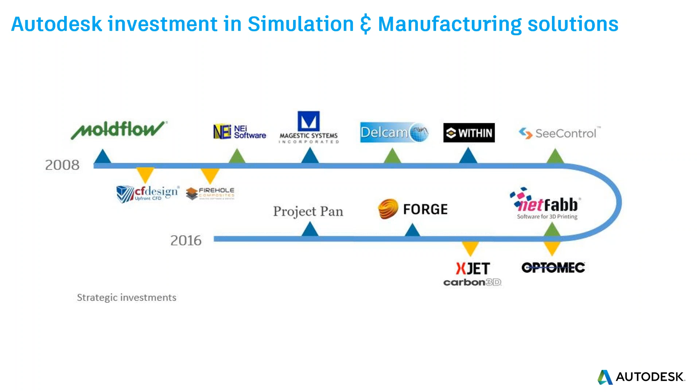Two key acquisitions for looking at mold tooling and the injection molding process are Moldflow and Delcam. Moldflow was established in 1977 and is a key brand name in the injection molding simulation world. We also have Delcam, one of the world's leading suppliers of advanced CAD/CAM software for the manufacturing industry. They were also founded in 1977 after initial development work at Cambridge University, and they've been growing ever since.

High volume production can take the form of injection molding for plastics. It's a very competitive area, and there's a lot of pressure on pricing, which can squeeze margins from any project. So differentiation into higher value business, addressing the needs of complex and more accurate tooling, helps regain a competitive advantage through use of new technologies and increased machine utilization.

This is becoming more important for the mold industry as designs become more complex, and critical mold tool design questions need to be answered early in the manufacturing process before they become expensive.

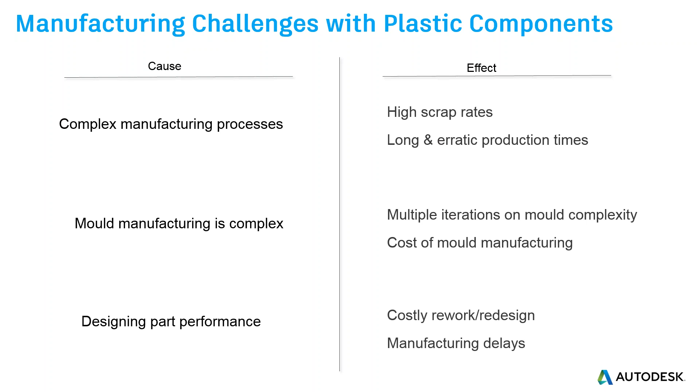If we look at the design optimization process, typically we would see this process of validation. Going from design into manufacture, the costs will increase, and the cost of making changes as you go through design, engineering, prototyping, and production becomes much more expensive. It increases tenfold at each step as rework becomes more complicated and more difficult to do on existing designs.

If we look at the optimization process, it starts in the design phase, where we can start to optimize part design and mold design. Any changes at this stage are relatively inexpensive, which helps keep costs low during the process, so there is no need to validate. Once you get into production, you already know what to expect and that things will work the first time.

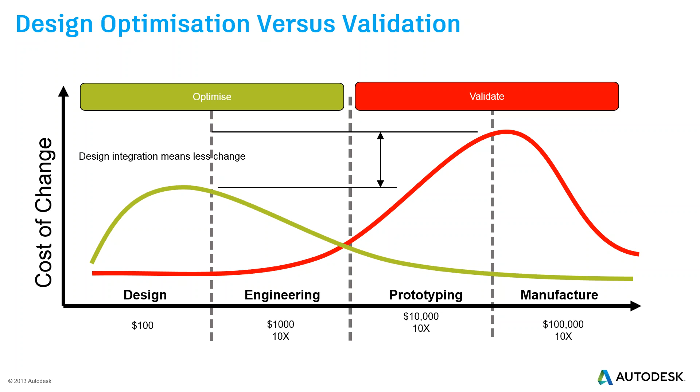Information can be passed on from design, engineering, prototyping, and manufacture, meaning fewer changes are required. We can identify issues very early on, eliminate them at that stage, and there's no need to make major changes downstream.

So it is a multi-stage development process. We look at the objectives of what we're trying to do at the top and the risks at the bottom. On part design, we want it to be suitable and fit. There may be structural requirements, but can we actually make the part? Will it be to the correct size?

Once you get into mold design, there are tooling features we can address, such as cavity and core design, cooling, ejection, gate and runners. But how do we know the cooling design is optimized? It's going to give you uniform mold temperature. Is the feed system design going to give issues? Where should you vent the tool?

Once you start cutting the mold, you can define tool paths. But are these optimized tool paths? Are they going to give you the risk of interference?

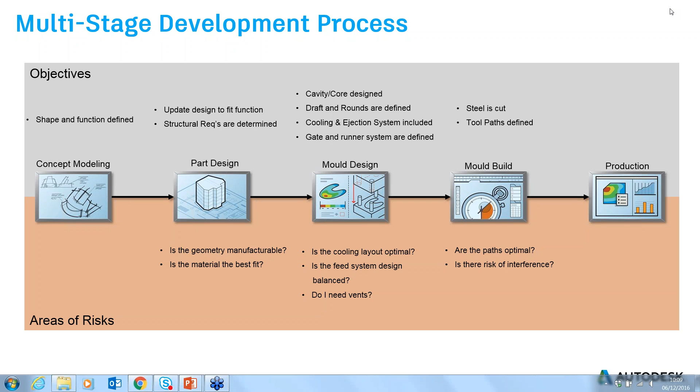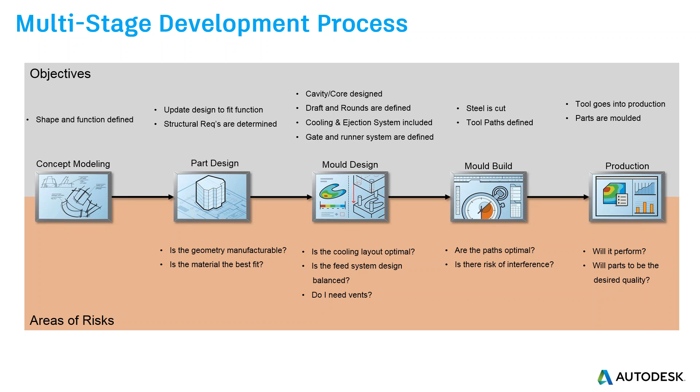Once you go into production, molding your parts, how do you know the mold will perform? Will the parts be accepted? Will they be of the desired quality?

So we can look at this another way. We can look at the stages that we typically go through.

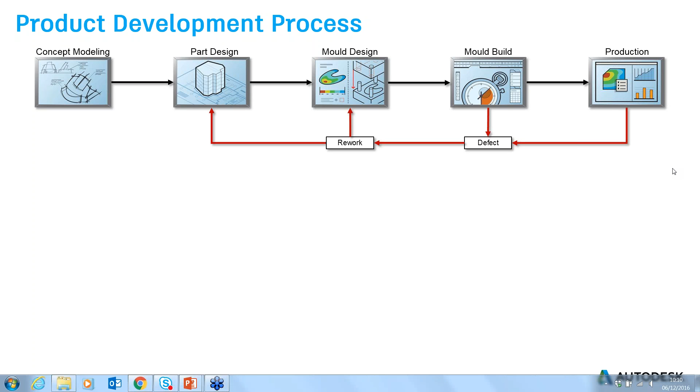And if we find defects while we're building the mold or while we're in production, then it goes back for rework, often involving redesign. It may be that the part has to be redesigned.

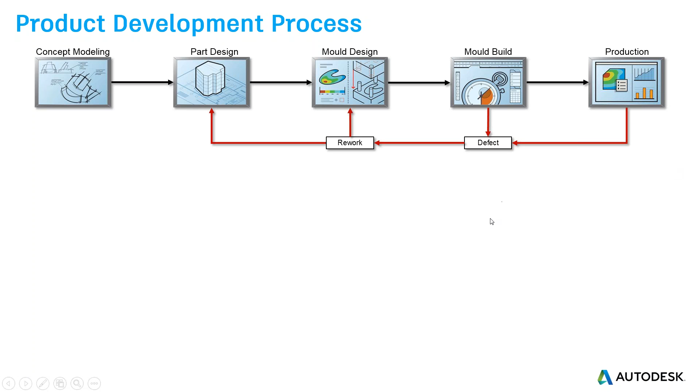So this is the typical process that we see. And as I said before, the costs do increase during this process.

If we start to introduce inspection, advanced techniques for making the molds, then we can start to identify defects in the mold that could lead to poor parts being produced very early on. And then we can actually redesign at this stage and rebuild the mold.

So this is what we call forensic analysis, where before we go into production, we can do some inspection, some forensic analysis. And this can save us time compared to finding out these problems when we're in production or trying to get the mold into production.

We can introduce CAE, simulation for plastics, coupled with mold design using advanced tools. We can start to identify any issues before the mold is built and eliminate them. So we can validate that the mold will perform before it is built, and this saves further time and costs.

If we can start applying these technologies very early on, even at the design concept stage, information can be passed along, verifying wall thickness, material selection, injection points, etc. And this will further reduce the costs and time. And now we're actually optimizing as well.

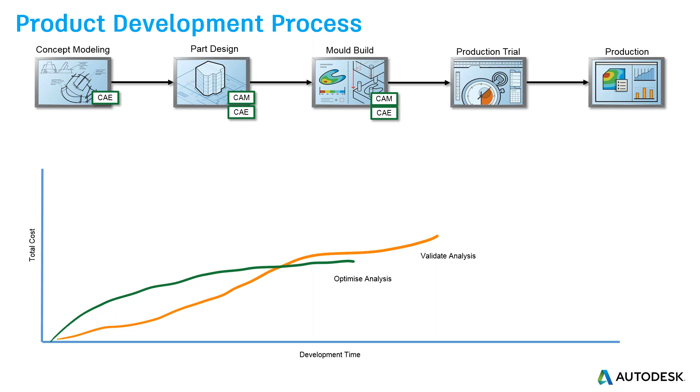So we're not just checking that the parts can be made to the desired quality. We're not troubleshooting, we're optimizing, so we can reduce costs in this way by making the whole process more efficient, making sure we're selecting the right materials, and even reducing material content.

So this has benefits for lower costs, reducing time to market, especially with warranty issues, recalls, and it gives you confidence that the design will be right.

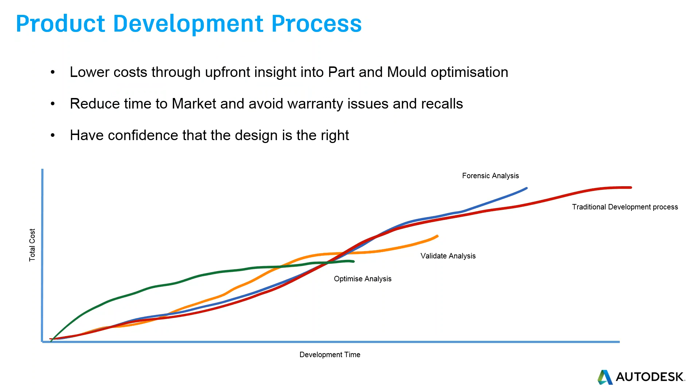So Autodesk can deliver these solutions to help you. It's a single source for parts, mold and injection molding process optimization. And it's using the leading plastic injection molding simulation with Moldflow and the leading machining technology with solutions from Delcam.

So we'll begin with looking at Moldflow. So at the part design stage, you could be faced with these challenges as a part designer. Will the part fill without defects? Where should it be injected to make sure that it fills okay?

Will it have surface defects? How do I know that I've chosen the right material for this molding? Will there be weld lines? Could be an area of weakness or visibly unwelcome.

Will the part distort after it's been molded? Will it be to size and shape? And will it perform in service? Will there be any issues because of perhaps high internal stresses?

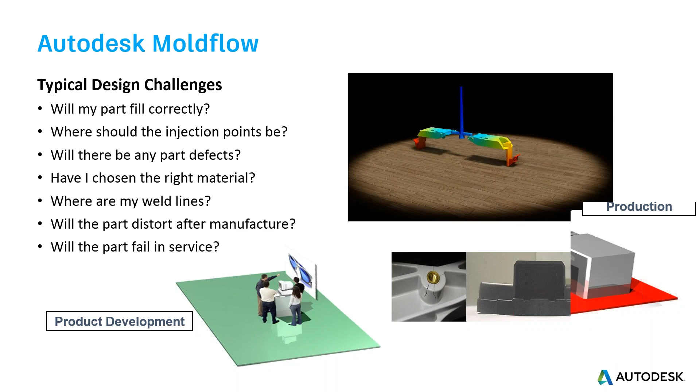And at the tool making, the tool design stage, there's lots of questions. So if you're adding cooling systems, are they in the right place? Are they optimized? And what mold shrinkage should be applied to the mold?

Is the feed system optimized? Is it over-designed? Is it balanced? And what machine can it run on? What clamp force will be required?

Will it be easy to mold? What will the cycle time be? Can that be reduced? If you've got other production tools, can they be reused again?

We want to know the mold's going to run first time. We don't really want the production guy to be trying to troubleshoot any issues to try and get the part in production.

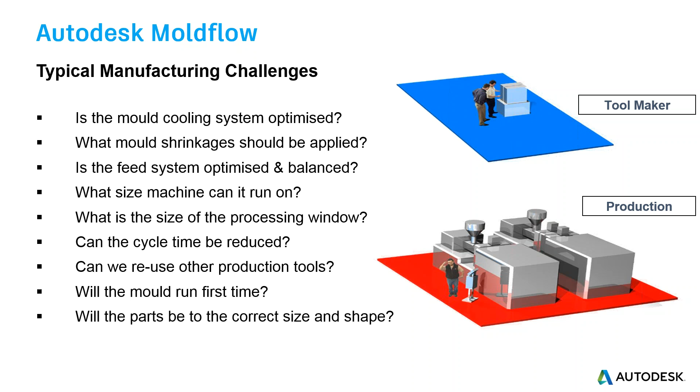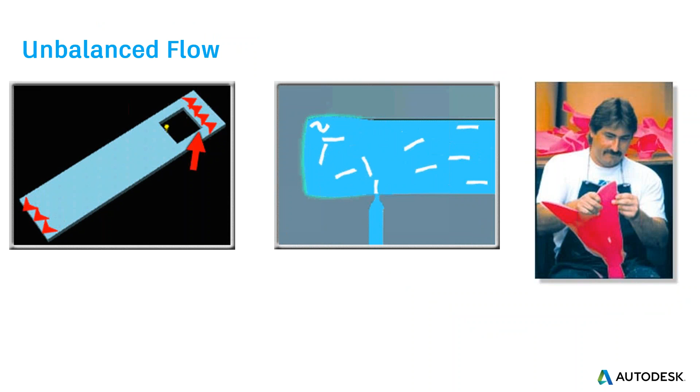So if we start with some of the basics, one of the main issues of poor product quality can be that of unbalanced flow in the cavity. So this means that some areas are filling before others, and while they're still filling other areas, these areas can become overpacked. They will shrink less.

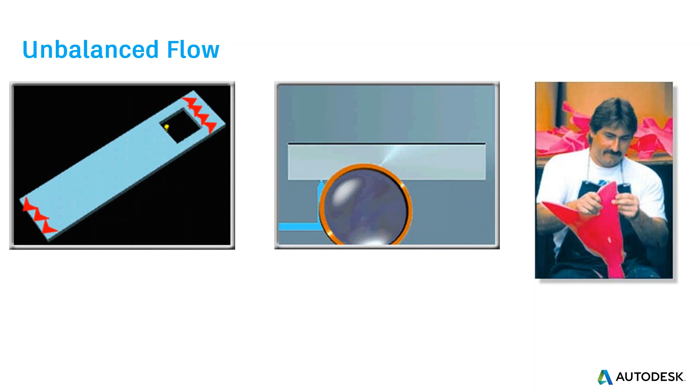Lower shrinkage will mean different dimensions, and also it can induce warpage in the component. It can also increase clamp force, and the mold may actually open and flash.

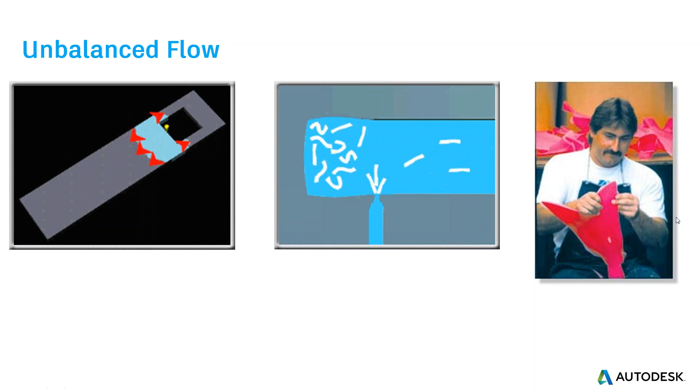And we still see people sitting by machines trimming off flash. And this isn't always due to mold wear. It can be because of this unbalance where the mold is open locally to let material out.

So Moldflow can help answer some of the basic questions of where to inject. If you've got this component here, we allow one injection point. Where would it go? There's recesses to the right, there's a lot of material to the left. Will it go in the middle, to the right, or to the left?

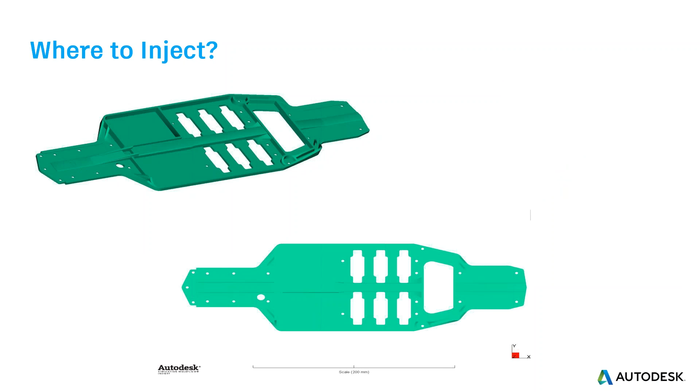Moldflow can show you the best place to inject for flow, simply going from blue to red, where blue is the best and red is the worst place. And in this case, we're leaning towards the right for the injection point.

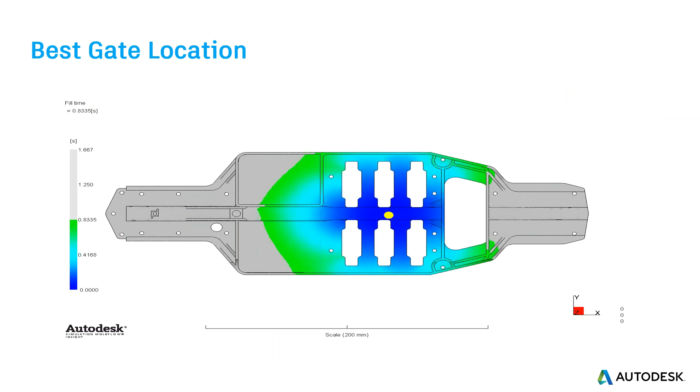If you put an injection point here, we can actually see how it fills. So we're looking at contours of filling in time, and we can see that the ends of the component are being reached at the same time.

And it has benefits for minimizing stresses in the component. It will reduce shrinkage variation, it keeps shrinkage under control, it can eliminate part warpage, it keeps clamp force to a minimum, and in turn that can help with mould life.

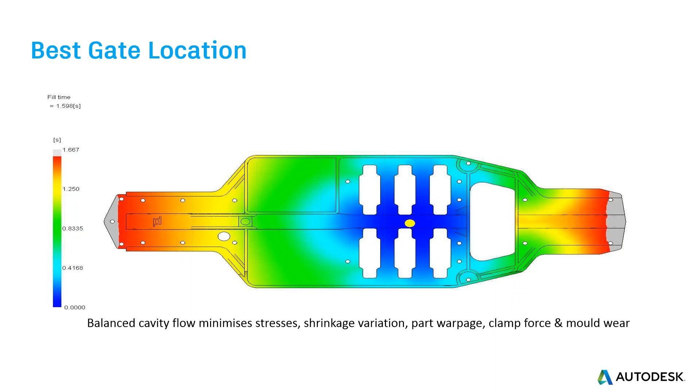With the feed system design, the same principles apply here. Is it balanced? Is it going to deliver material into the cavity so that it fills uniformly? The software is capable of resizing runners automatically to make sure cavities fill at the same time. It will allow you to look at the size of gates to make sure they're not over shearing the material, degrading it, or changing the colour of the material.

So again, this can eliminate flash, reduce clamp force, and increase mould life.

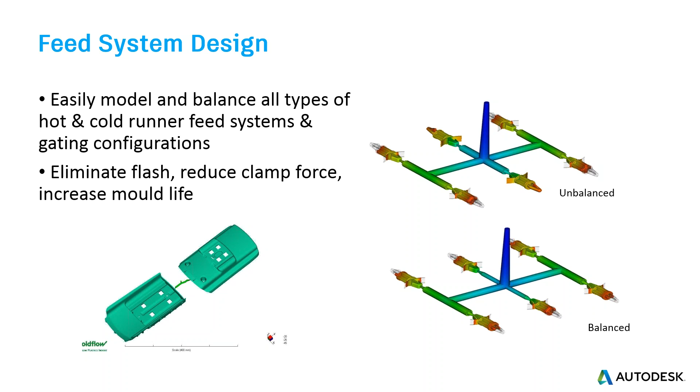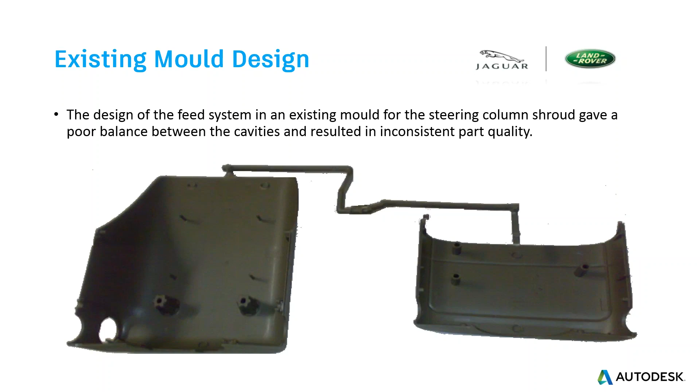So one of our customers, Jaguar Land Rover, they had a 1+1 tool, and this gave problems during injection moulding. It's a poor balance between the cavities, and it resulted in inconsistent part quality. They couldn't get the sizes quite right for both of them. So they looked at resizing the runners, but it was difficult to achieve with the existing runner design. So the only balance that could be achieved was with an S-shaped runner, which gave a longer length to balance on, and that was very successful, giving them some savings just on that one tool.

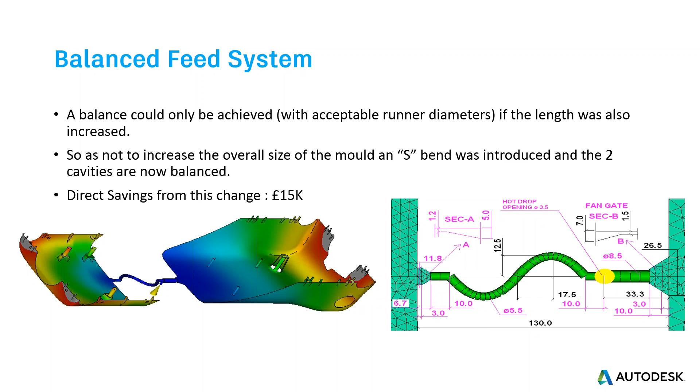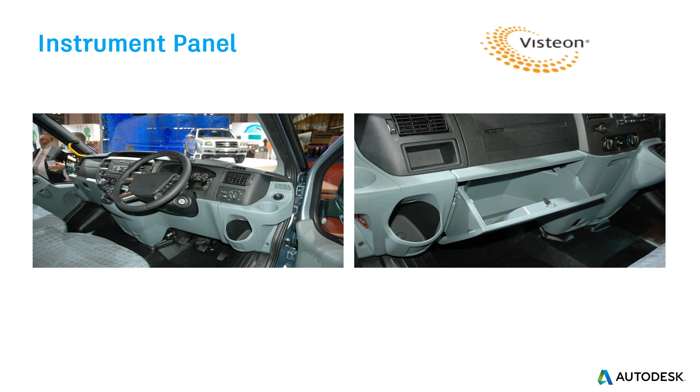We go to another level. This is from Visteon. They partner with many companies for the design and manufacture of components. Looking at the instrument panel here, initially this is going to be 2 moulds - one mould for a demister component and the main panel.

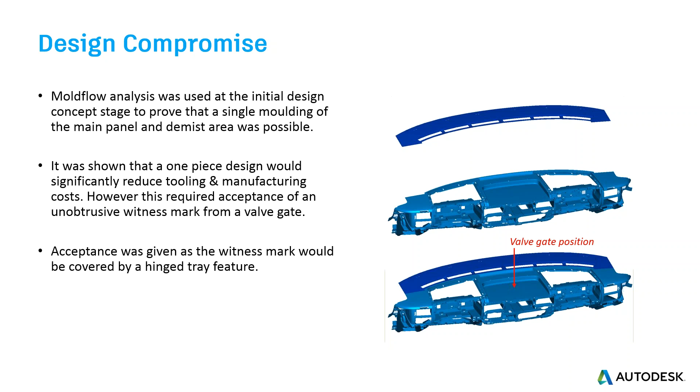And Moldflow showed that it could be moulded in one piece, in one mould. It would mean a witness mark from a valve gate being visible, but that was accepted because that could be covered by a hinged tray feature.

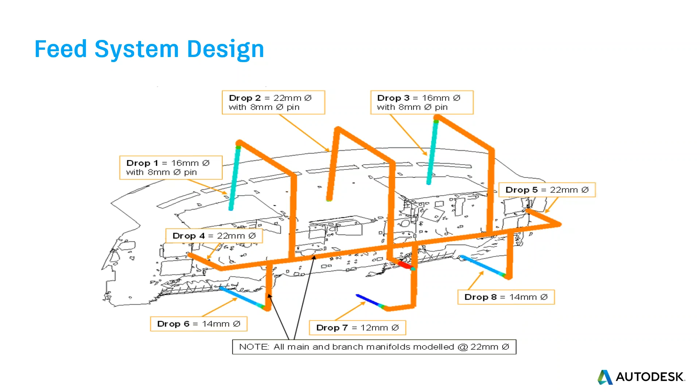Weld lines were moved to less critical regions by placement of the gates. Wall thickness variation will do that as well.

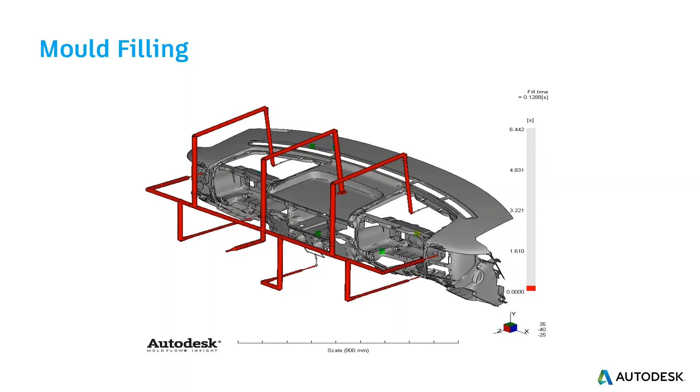Moldflow can also look at the details of hot runners, so detailed modelling of these can be achieved. This helps you to see where the heat from such hot runner systems will go. Will it actually get to the cavities, making them longer to cool, make them hotter on one side? And are they insulated correctly?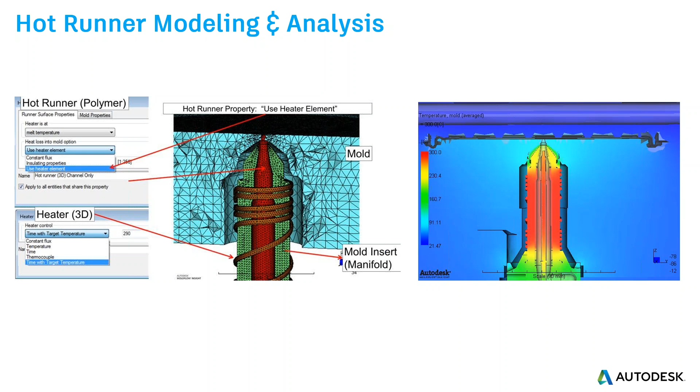So Moldflow will show the heat dissipation and allow you to make sure that your hot runner won't have any adverse effects on the process.

Our customers are using Moldflow in various ways. Haidlmair, they're a company that makes large volume moulds. In this case, they've got a big recycling container. But they're using Moldflow to actually reduce the weight of the mould.

So a lot of the weight's often in the fixed half. And by making sure they have the right injection positions, they can keep injection pressures low, stresses low, and they're able to redesign their moulds not to have so much material. They can reduce clamp force in this way, so the stress on the mould is not so significant. This also has benefits for reducing the energy of the injection moulding machine.

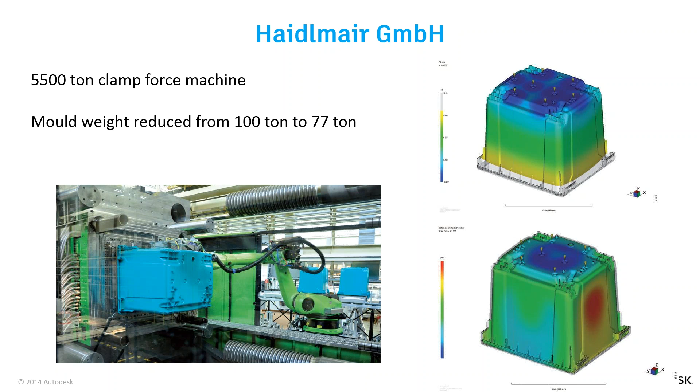There's also mould cooling to consider. How is the mould being cooled? You need to take heat away from the hot plastic coming in. So Moldflow can show you where to best position cooling lines, shows you the effect of cooling line position on removing heat. This can be steady state or transient.

You can interrogate results through the mould blocks, look at the effect of different mould block materials, see how many cycles are required to get the mould to a steady temperature, and look at the temperature variation within each cycle.

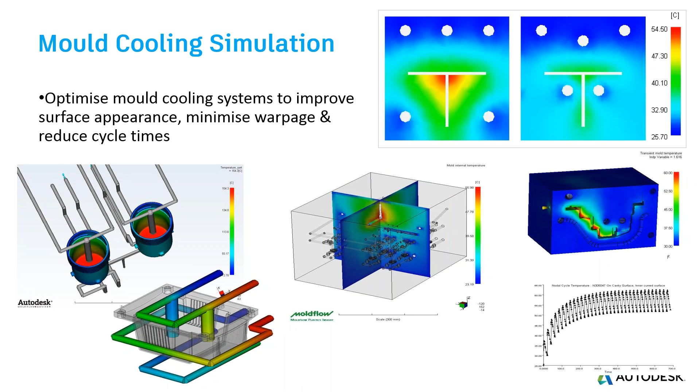Cooling lines can be imported or added within the system. This is an area that's often neglected, because if you have differences in mould temperature from one side to the other, that can promote bowing of the component. It can affect final size.

So one such company, Cooper Vision, they're already running a high cycling mould. They're running at 11.2 seconds. They wanted to get this down to 8 seconds. This would have a significant effect on output.

So using Moldflow, they were able to pay attention to the mould cooling, and they got cycle time down to 8 seconds. These moulds run for 24 hours, 7 days a week, for 3 years. So the quality has to be good, making sure that the modified cooling doesn't adversely affect the components in terms of size and the way it fills.

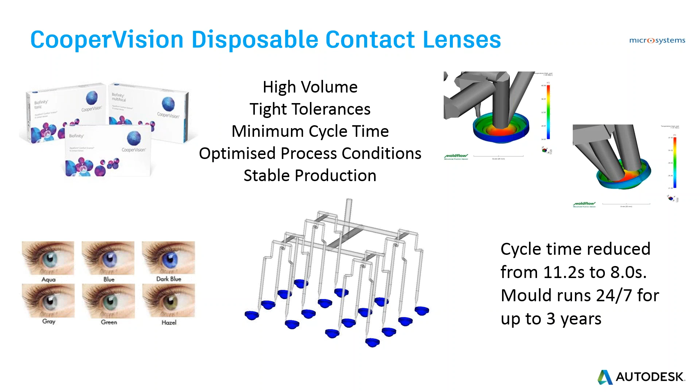Certainly we don't want to be seeing moulds being used as cooling jigs. So often parts can be kept in the mould for a bit longer to try and keep them to shape. But invariably the stresses will relieve themselves and you still end up with a warped moulding.

So this twisted bin lid was kept in the mould for an extra 40 seconds to help keep it flat, so it's running over cycle time. They're making more bins and lids. It was center gated, and Moldflow showed that had it been end gated, it would be nice and flat.

So rather than use the mold to try and eliminate warpage issues, Moldflow will show the cause of the warpage and allow you to eliminate it, preferably at the design stage, by paying attention to wall thickness variation, gate position, and processing conditions.

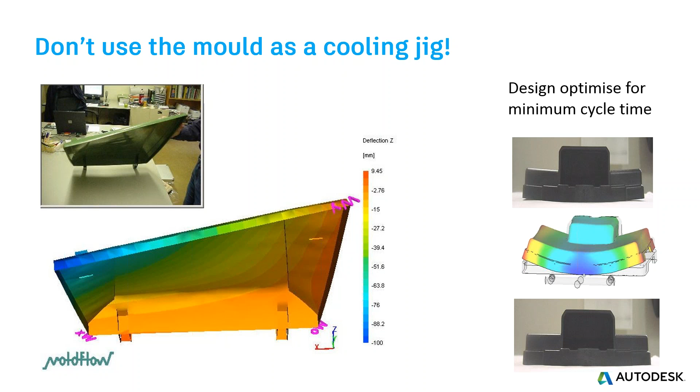Now we start to look at the manufacture of the mold, and there's many challenges here. There's the challenge of how do we actually make a large or complex mold. It won't be easy. How do we prepare for this?

Can we read in surface, solid, wireframe and mesh from any CAD system? How can we eliminate errors that can cost us? You've got multi-axis machines. How can we improve the efficiency of these? There's always pressures to improve the surface quality and accuracy of molds.

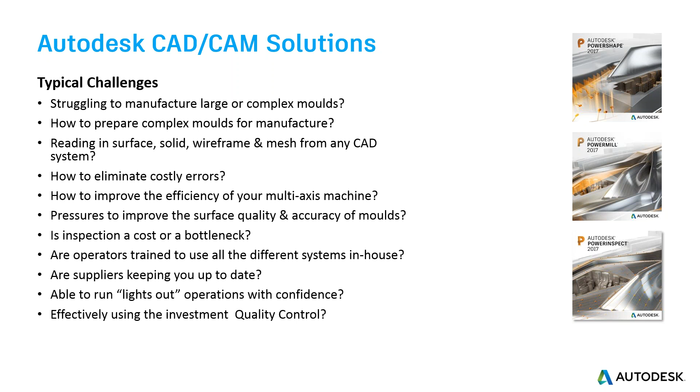And are you finding that inspection is a cost or a bottleneck in your company? You may have different systems for making molds, for measuring molds, but are your operators trained to use all the different systems in-house? And are the suppliers keeping you up to date? Are you able to run lights-out operations, mold manufacture and inspection with confidence? You may have invested heavily in quality control, but is that investment being effectively used?

So there are CAD/CAM solutions that we can turn to.

This is Powershape. So this is creating molds and dies and modeling for manufacture. This is where it excels. It allows you to create complex 3D geometry that you need to control your multi-axis or high-speed machine tools. It operates on 3D data regardless of which system created it, and it doesn't matter which format it is in. It can be solids, surfaces, wireframes, and even meshes.

Once imported, intelligent analysis tools automatically detect and repair critical faults that could complicate downstream processes. And unlike many CAD systems, Powershape doesn't insist on you having to fully repair your solid before you can do further work. There's many commands, including direct modeling tools, which will still work even on faulty solids.

So when creating cavities and cores and slides from a 3D part, Powershape will guide you through an easy-to-use wizard. In most cases, the shutouts and split faces are created fully automatically, leaving you minimum work to do to finish the mold.

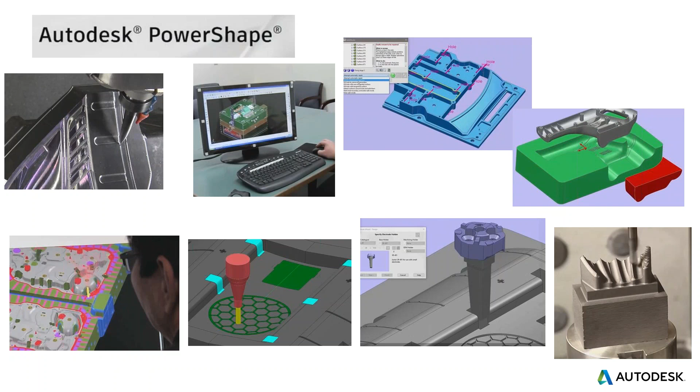We also have Powermill. So many of the world's successful manufacturers grow their business by making increasingly complex parts faster and more accurate than their competitors.

So to help achieve this, they invest in more modern capable machine tools, such as high-speed multi-axis machine tools capable of milling and turning, able to cut complex parts in only one or two setups. However, the full potential of these machine tools cannot be realized without equally advanced CAM software. So this is where Powermill comes in.

It has the flexibility to work on solids, surfaces, wireframes and STL meshes imported from any CAD system. It contains a comprehensive selection of 5-axis toolpath strategies, each able to drive a wide variety of tools, including specialized cutters such as lollipop and barrel tools.

And with Powermill, your parts are machined how you want to machine it rather than how your CAM software wants to machine it. It excels at toolpath optimization, and toolpaths can be trimmed and reordered to suit your needs.

For good surface finish, Powermill allows you to modify entry and exit moves, cut directions, and many other machining attributes, all without costly and time-consuming recalculation. You can create your own toolpath macros and templates, which allows you to fully automate time-consuming repetitive tasks. Programming time can be reduced by taking advantage of 64-bit multi-core PCs that people use today.

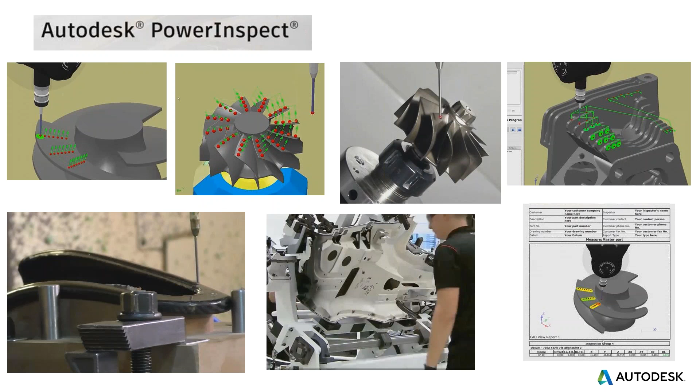We have some customers - there are many, and I haven't got time to go through all of them, but one such company is WHS Plastics. They're a tool maker for automotive. They do injection molding, with 100 injection molding machines. They have machine tools and spark eroders, and operate over 2 sites.

They have products such as Powermill and Powershape for their tooling strategies, and this allows them to directly address time to market. They do collision checking and simulation, so they can run at full speed, lights out, and this also helps address time to market while controlling quality. This company achieved a 20% greater throughput from the existing machines in the first 3 months of use.

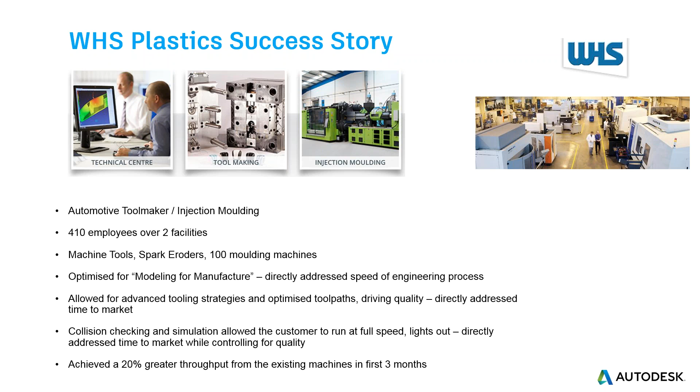There's many other companies - Avenue Mould Solutions in Ireland. They make precision moulds, mainly for the medical industry, and perform injection moulding, based in Ireland. Apart from products such as Powershape and PowerInspect, they also use Moldflow to optimize the mould design and part design before mould construction takes place.

Smithstown Lite Engineering, also in Ireland, also make precision moulds for the medical industry and perform injection moulding. Gotools, precision tool makers based in Yorkshire, make moulds for automotive, medical, consumer, electronics and packaging.

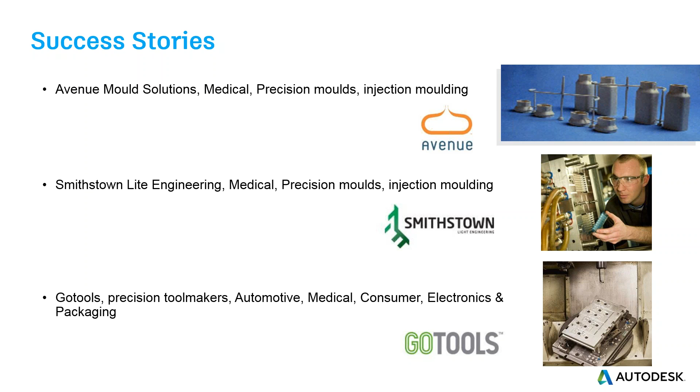Some examples there. So what else do we have that can help with tooling? If we look at the traditional way of cooling moulds with simply straight drillings, water lines - we're now considering, many companies are considering using conformal cooling. These can be cooling channels, cooling blocks that follow the contours of the part, giving you more uniform and efficient cooling. So if we take this blender, for example...

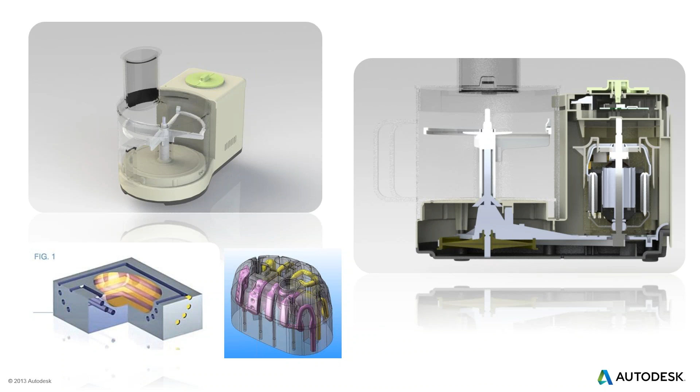We can use Moldflow to simulate how the component will fill, making sure that there's no adverse effects on part quality.

Moldflow can also perform conformal cooling analysis, so it can look at how the cooling lines perform. In this case, these aren't simple drillings - these are more complex cooling lines designed to effectively remove heat from the component, inside and out.

Moldflow can predict the temperature of the plastic, the temperature distribution required to have heat removed. So it works out the heat load that the cooling lines have to work with.

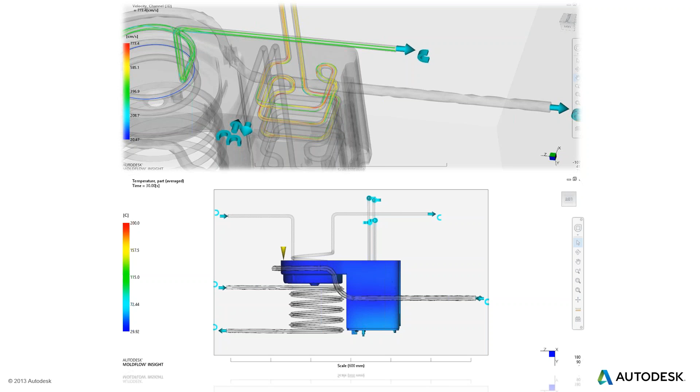We can also use the pressures inside the cooling lines and the pressures inside the cavity from the injection moulding process to look at the stresses in a conventional mould. Which area is actually absorbing the stress?

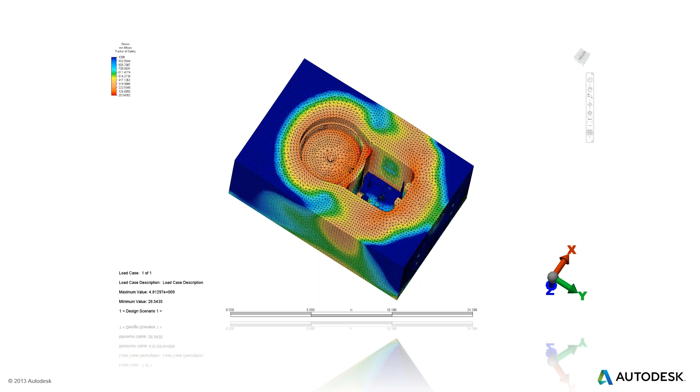We can then go on to perform an analysis where we come up with a new structure. In this case, we've seen a lattice structure designed to absorb those stresses, absorb those forces from the cooling lines and the injection melt. This offers a great reduction in mould volume and mould weight.

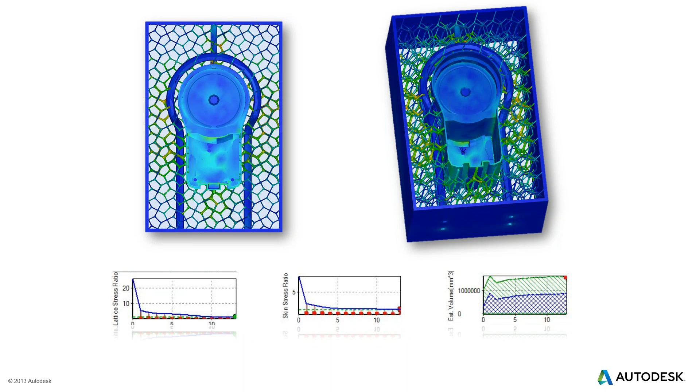So we end up with a lattice structure. This cannot be made by normal means - it would have to be made by processes such as additive manufacturing. We can then build the bolster around this.

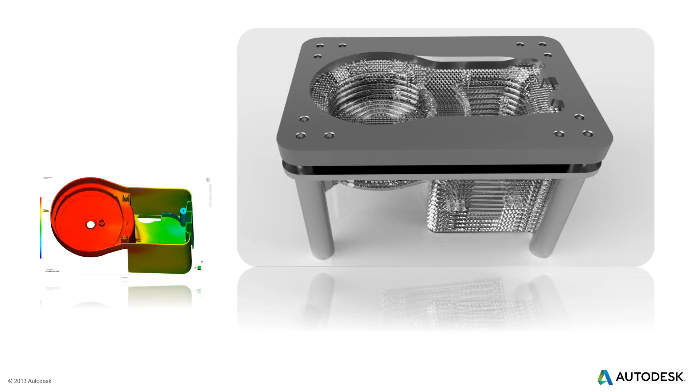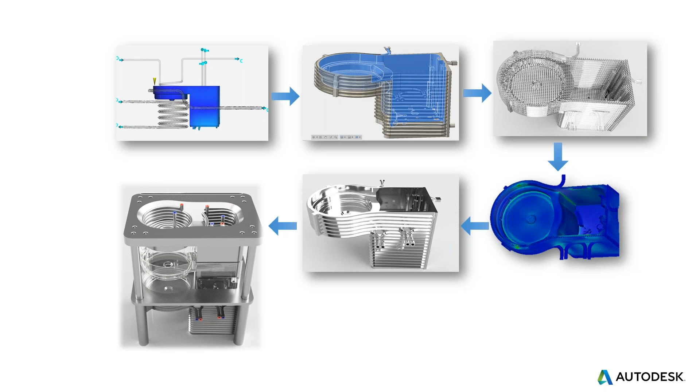So we can go from initial simulation of conformal cooling, identify where these cooling lines should be, design a mould to support this, evaluate the stresses and loads in the system, and further redesign the mould to be supported. We end up with a mould that can be 45% reduced in volume compared to the conventional mould, and also offers a 10% reduction in cycle time.

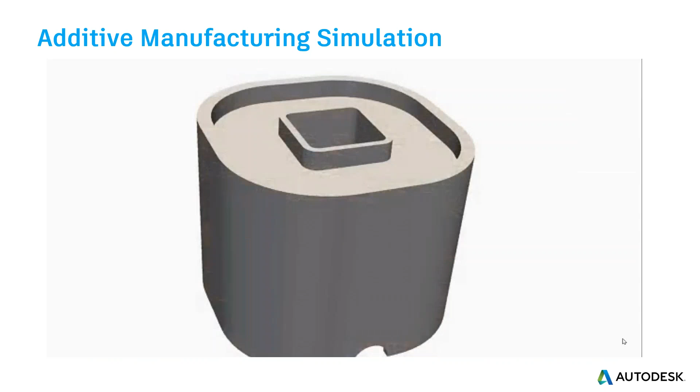So that mould will have to be made by additive manufacturing, and this is another area where Autodesk can excel and are leading in simulating. So a lot of structures, a lot of components can be made by additive manufacturing, 3D printing, whether they're plastics or metals.

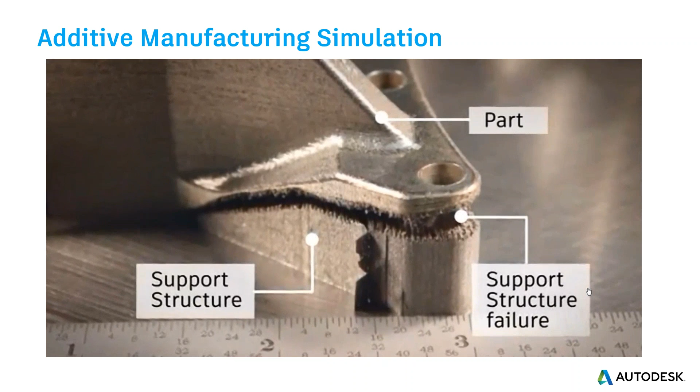But this process does not come without its own issues. You're heating metal, you're melting it, it's cooling down, and this can give rise to thermal stresses which can cause cracking. Also, you need to support such structures while you're building them, and the supports can also fail.

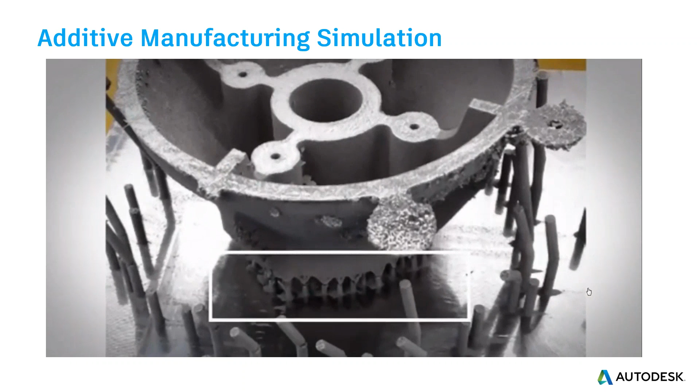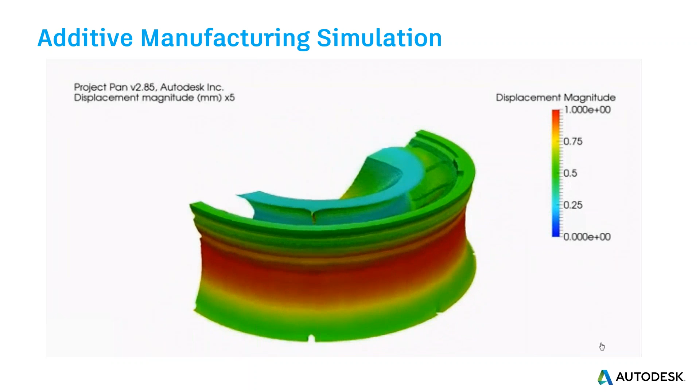So with such products from Within and Netfabb from Autodesk, you can help to optimize this process. It can simulate how the build is performed, temperature distributions, stresses, and also can predict deflection or displacement of the final product. Will it be to the size you want due to distortion, due to thermal stresses? So it's best to know this up front, because such processes can take many hours or days to complete.

We're also looking at Moldflow ejection force, which is in development at the moment. This will use our embedded Nastran solvers in our structural analysis programs, and it can look at the ejection forces required to remove a component, and also help you place your ejector pins and size them without perhaps giving these visible stress marks that we often see on components, which can be distorted or stressed during the ejection process.

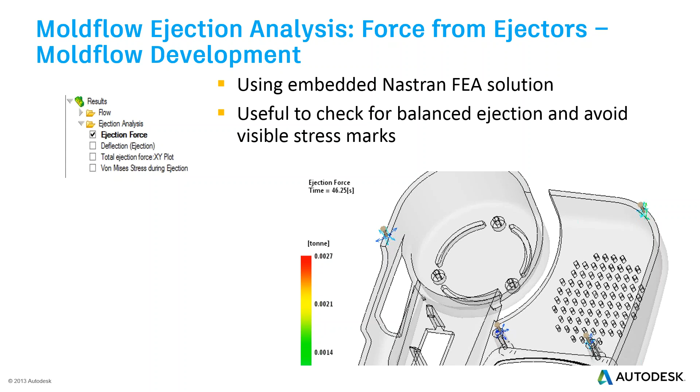We're also looking at predicting mould life. If you consider that a mould goes through a lot of stress cycling, it's got hot plastic coming in, which is then cooled. It's got high pressure melt coming in, and that pressure dissipates. And you've got mould clamping forces around the mould. These can all induce stresses in the mould.

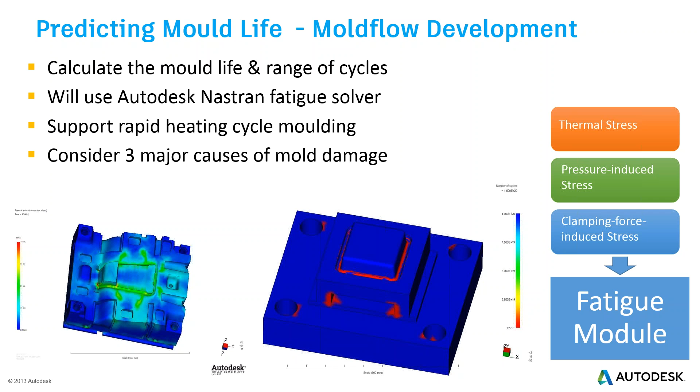And using a fatigue analysis, again from our Nastran solver, we can predict fatigue, we can predict mould life, identify which parts of the mould will fail first, and also identify what is the cause of this failure. Is it thermal, is it pressure, or is it clamping force induced stresses?

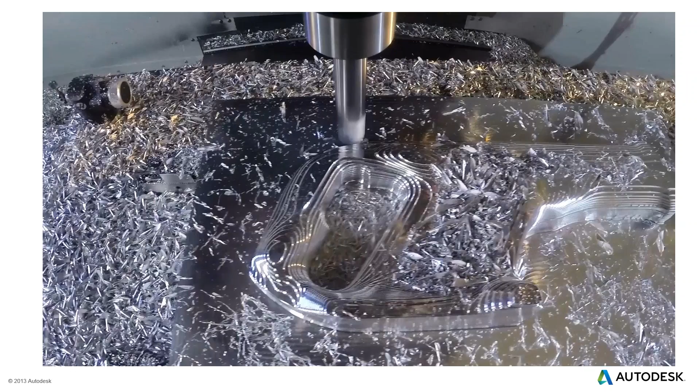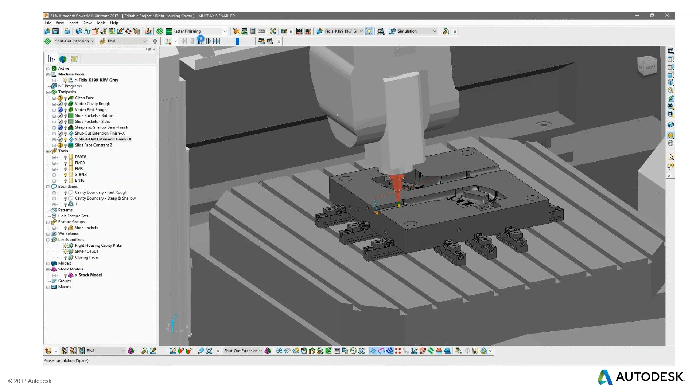Okay, so I'd just like to summarize, put some things together, summarize what we have seen today. So we're looking at complex tooling. We need to get costs down to be competitive, so we need to be more efficient, and parts are becoming more complex. We need to make critical decisions very early on. So we can use the combination of Moldflow and the CAD/CAM solutions to help drive this.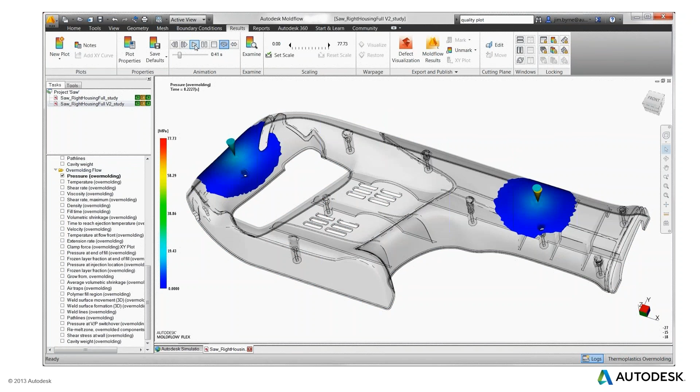So we can begin with Moldflow to evaluate best gate positions. The part can be filled defect-free. Will there be weld lines, air traps? Can we eliminate distortion? We can look at conventional injection molding, two-shot, insert over molding, other processes as well. But we need to make sure the part is manufacturable at this stage.

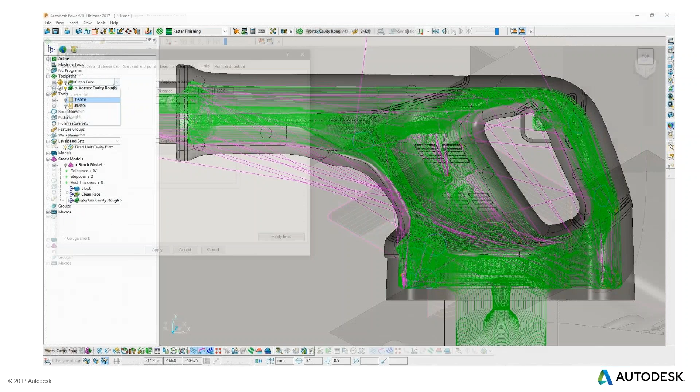Once tool design is completed and ready for manufacture, focus turns to improving quality, accuracy, repeatability and finish of the machining process. High efficiency tool paths, both in terms of calculation and cut time, are important to minimize project lead times. Minimizing tool lengths to reduce vibration and improve surface finish can be achieved by using the full capability of multi-axis machines. Tool axis decisions can be made prior to calculation or quickly applied afterwards, fine-tuning the output desired for the machine.

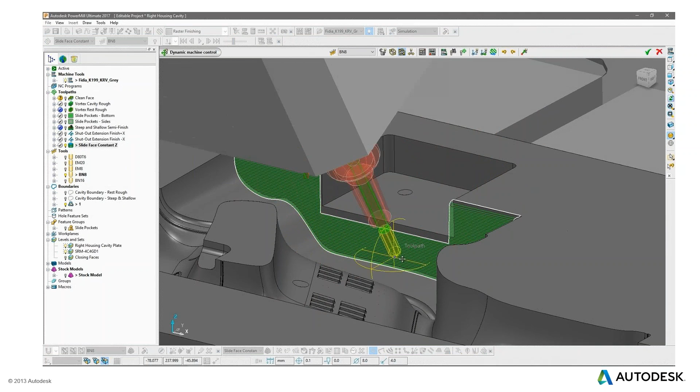Simulation and verification before machining can reduce downtime, providing confidence for unattended production. Taking a right first-time approach means making sure the material is loaded in the right position prior to machining. Automated part alignment means a quicker, accurate and consistent setup.

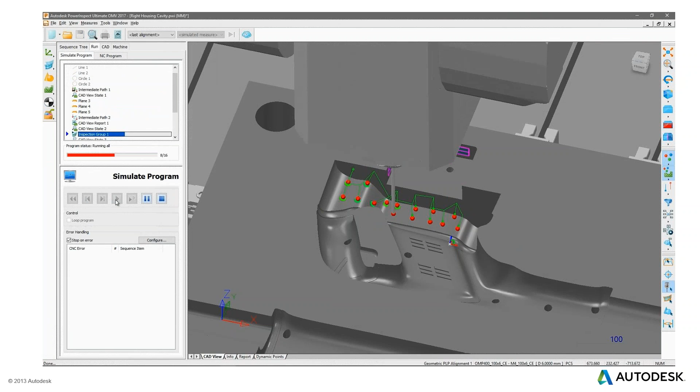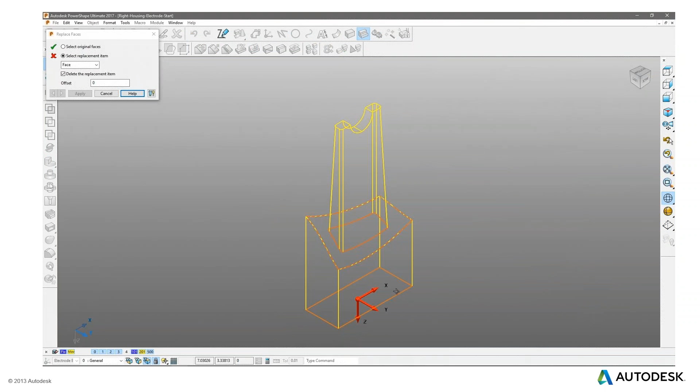Part verification while the component is still on the machine can be used to check the accuracy. For finer details, electrodes can be used to finish areas of the tool that cannot be machined by conventional means. Electrodes can be extracted directly from the model, machined and inspected, as well as being positioned accurately in the EDM machine itself, all with an automated workflow.

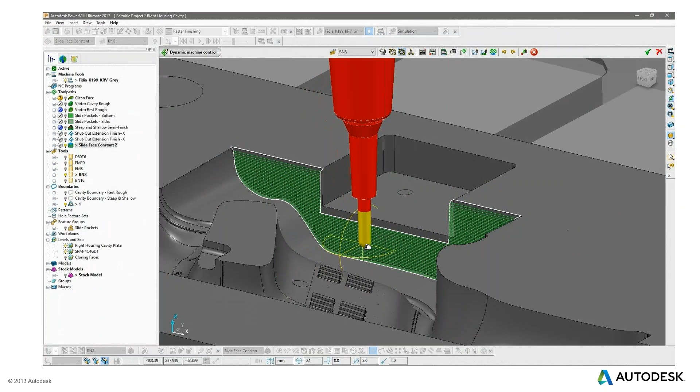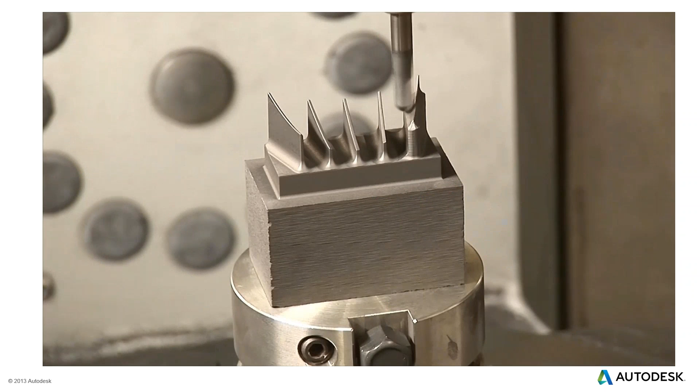So what we've seen: PowerShape for mold tool creation, Moldflow for molding simulation and analysis, PowerMill for toolpath creation and machining, and PowerInspect for inspection. Also looked at the electrode process, which combines PowerShape, PowerMill and PowerInspect to provide a closed-loop system between electrode design, manufacture and metrology. And all of this to deliver high-value tooling.

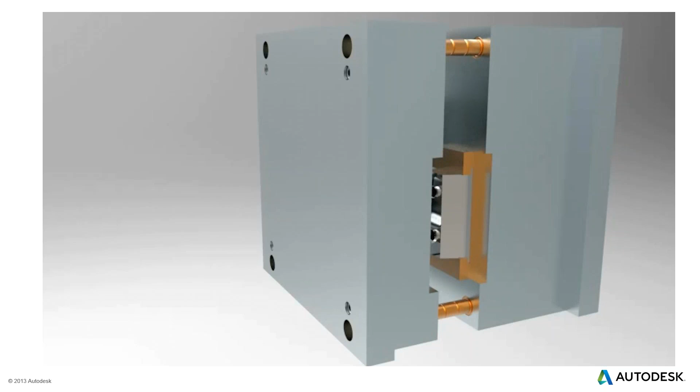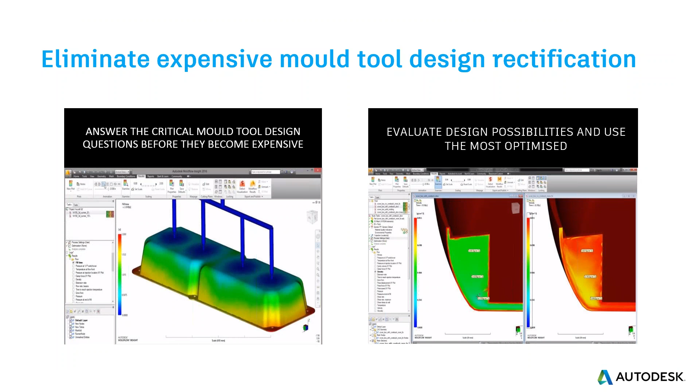So Moldflow to answer critical mold tool design questions before they become expensive. Evaluate different design possibilities before the mold is built. Looking at products like Powershape for optimum tool path creation without recalculation. Preparing your models for manufacture.

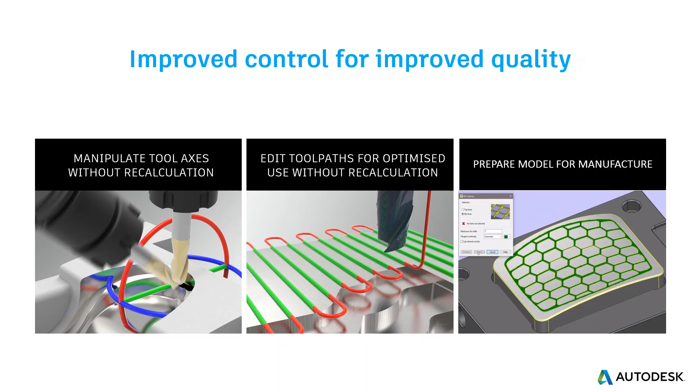Products, solutions like Powermill, making sure we've got collision-free tool paths, making sure we can run unattended production with confidence, and evaluate optimized setups for different machines that you may have on your premises.

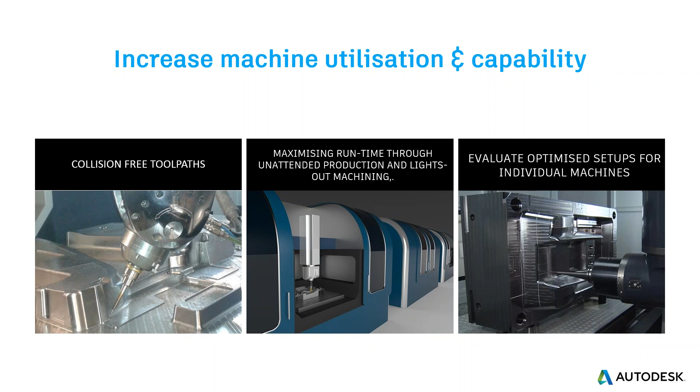Okay, so the takeaway that we have for you is that Autodesk Solutions provide the capabilities to thrive in the future of making things. So it helps you to keep pace with the way things are being manufactured. We need to be more efficient, parts becoming more complex, and using the solutions that I've been showing today, this gives you that ability. And the bottom line is for you to win higher value business in the tooling industry using the unique breadth of solutions from a single vendor.

Okay, so I'm at the point where I can take questions. I hope you have found that very useful.